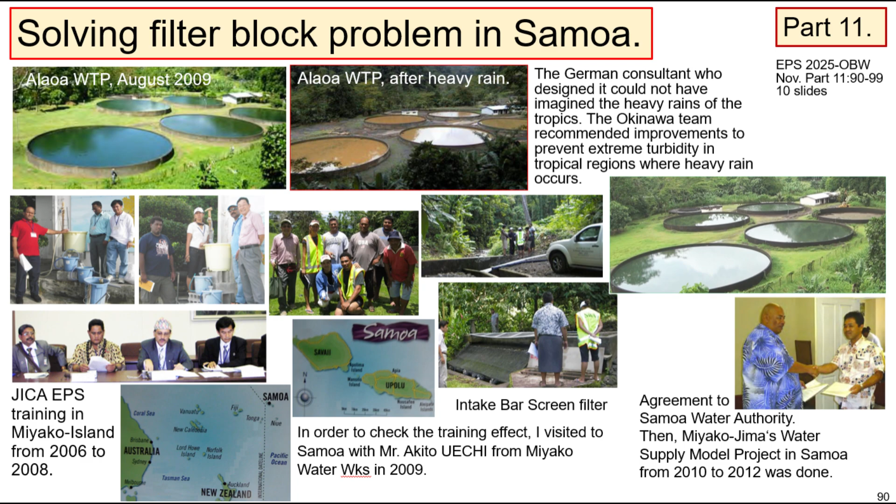The German consultant who designed it could not have imagined the heavy rains of the tropics. The Okinawa team recommended improvements to prevent extreme turbidity in tropical regions where heavy rain occurs. During heavy flooding or rainy days, high turbidity blocks sand filters. This filter block happened because of a misunderstanding of the real mechanism.

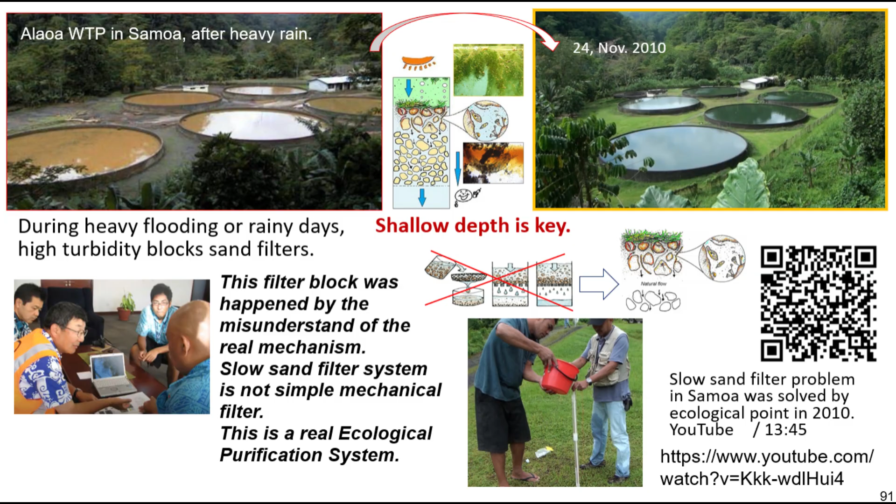Slow sand filter system is not a simple mechanical filter. This is a real ecological purification system. I recommended to them that shallow depth is the key.

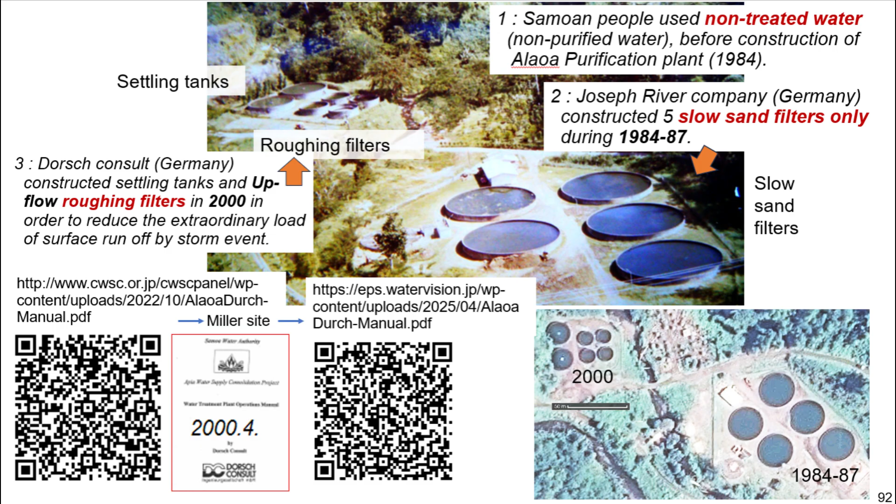Samoan people used non-treated water, non-purified water, before construction of Alaoa Purification Plant, 1984. Joseph River Company, Germany, constructed 5 slow sand filters only during 1984 to 87. Dorsch Consult, Germany, constructed settling tanks and upflow roughing filters in 2000 in order to reduce the extraordinary load of surface runoff by storm event.

We checked the manual. Retention time of settling tank is 3.3 hours. Upflow roughing filter is multi-layer type. And the filter rate of slow sand filter is 3 meters per day in the German manual. The biological activity should be high in warm Samoa.

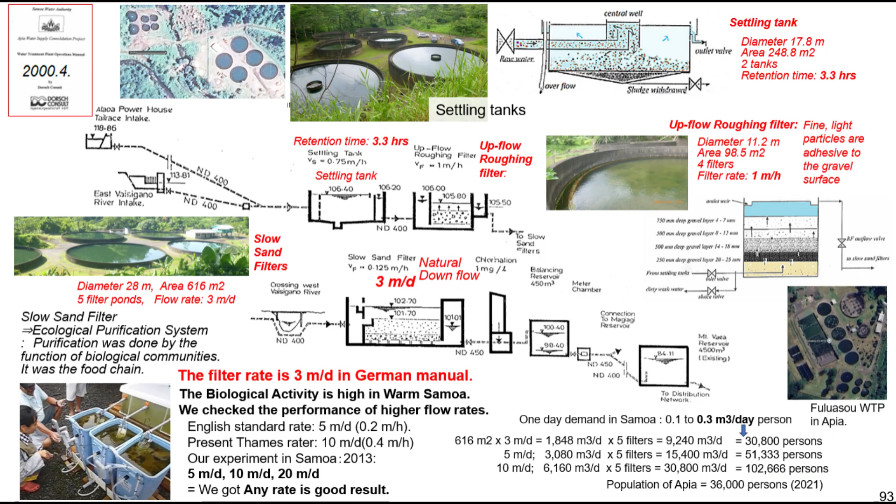We checked the performance of higher flow rates. Our experiment in Samoa in 2013 was done at 5 meters per day, 10 meters per day and 20 meters per day. We got good results at every rate.

We were surprised there was too much inflow. This was too short a residence time. Suspended matter did not sink. We recommended reducing the flow rate. And water depth was so deep. A large amount of mud settled and accumulated on the bottom. We recommended to them: put more sand to make a shallow depth.

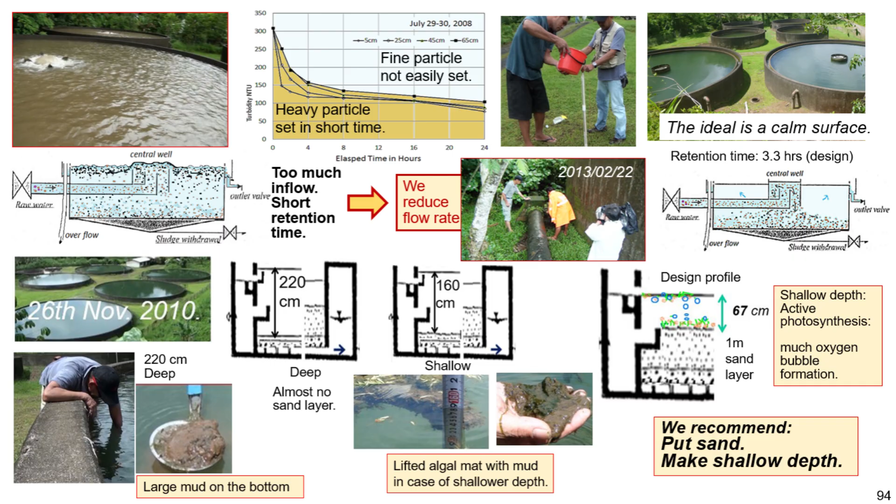Shallow depth accelerates active photosynthesis and produces much oxygen. And oxygen makes bubbles. Water depth is the key for the ecological purification system. In case of a deep filter, there is high pressure at the bottom and low radiation reaches the bottom. In this condition, algae hardly grow at the bottom due to low radiation. And this filter is easily blocked.

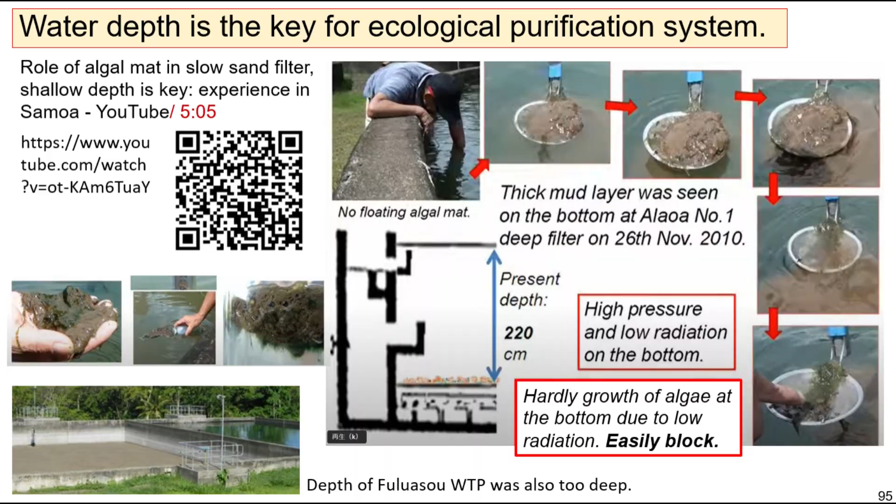Beach sand near a river mouth was washed to make a shallow depth of slow sand filter pond. And I knew there was only a sand layer on the bottom porous brick in slow sand filter ponds in the UK. Only the sand was put on the gravel layer, using a cloth to separate them.

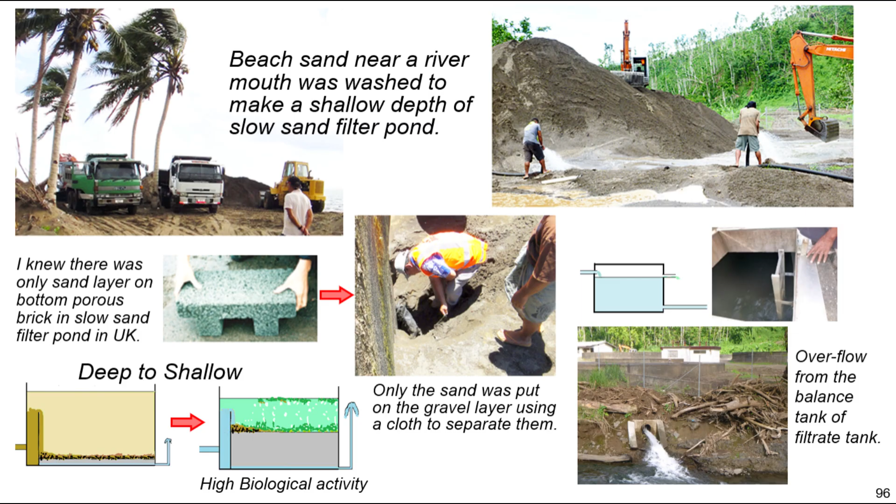We noticed overflow from the balance tank of the filtrate tank. Supernatant water depth in the upflow roughing filter is 1 meter over the gravel layer. I advised to put more small gravel over it to reduce water depth. They filled it almost full of gravel with small crushed stones.

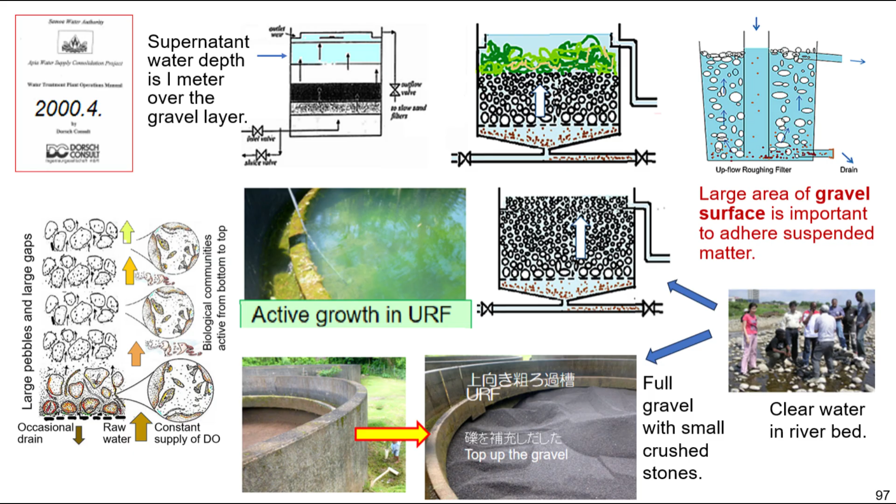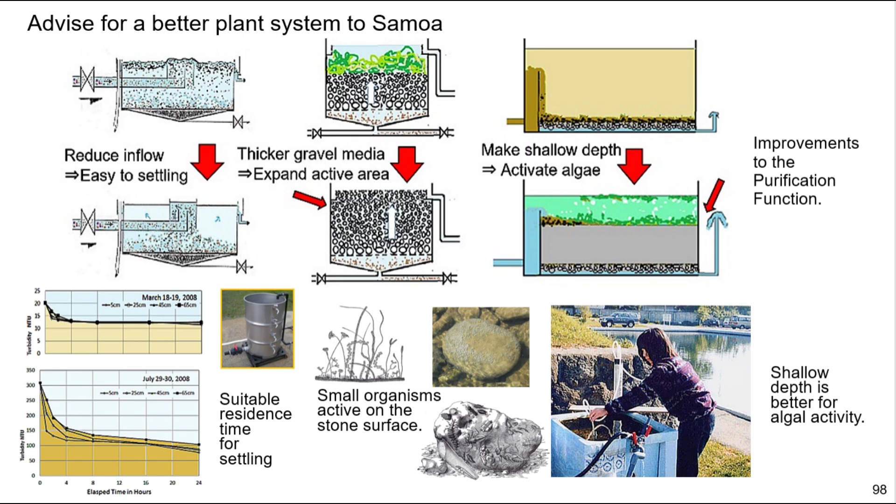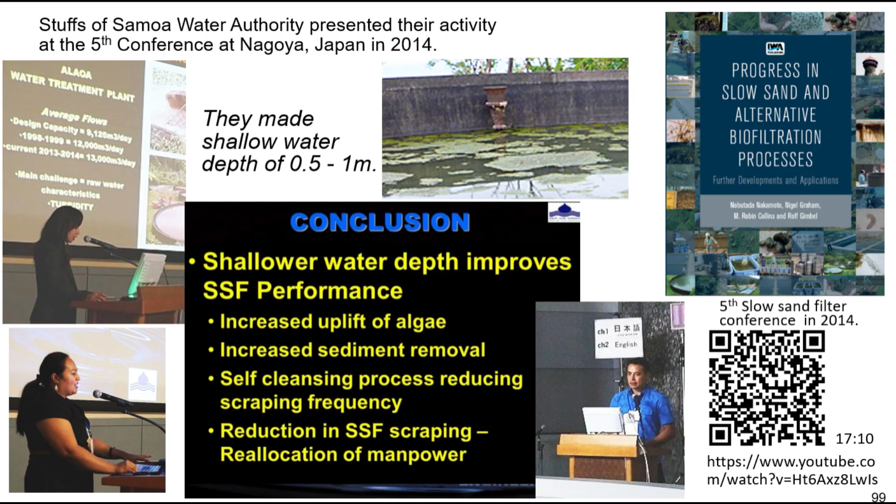The problem is that all 3 of them left SWA and moved to other countries, so the knowledge they gained is not being passed on to the remaining SWA staff. This is because the name SSF does not consider the role of the biological community to be important. Therefore, it is necessary to change the name from SSF to EPS.